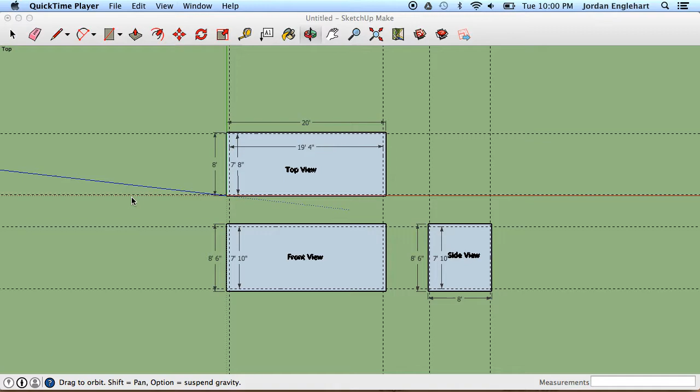Alright, welcome back. This is part 2 of making your shipping container template, the second formative. You should have completed an orthographic view of your drawing and submitted that to Moodle.

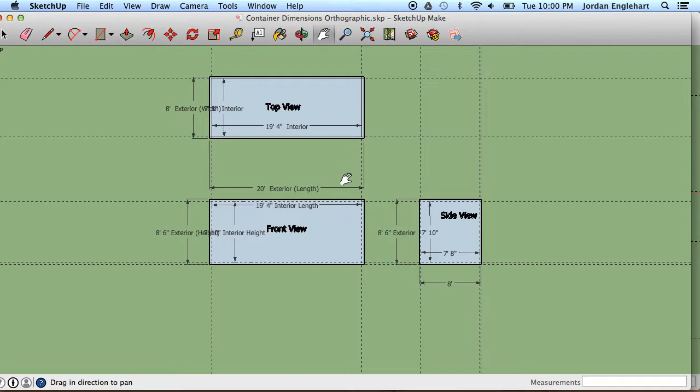This gives us the overall dimensions and familiarizes you with how thick each wall is. I'm going to have two of these open, one that I'll refer back to as I'm instructing since it has all my dimensions on it and I know how thick everything is. If you want a second copy you can, or you can start from scratch.

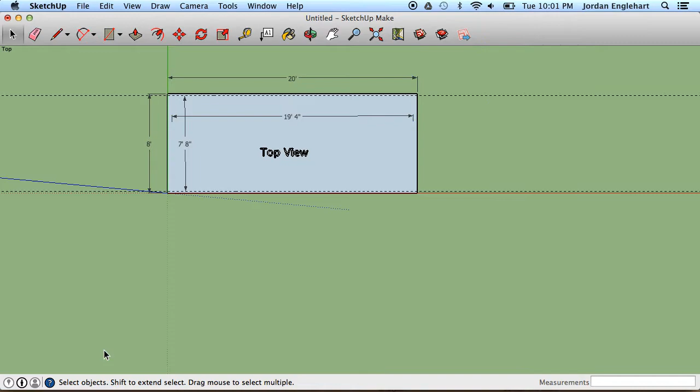So I want to keep this top view. This is where I'll start from. I'm just going to delete everything else underneath it here. Dragging from right to left highlights all that stuff and I can get rid of it. I also can get rid of some of this other nonsense I don't need now, since I have it in this other drawing.

But if you want to just start from scratch you can. You can draw a new rectangle at 8 feet by 20 feet, or 20 feet by 8 feet. So what I'm going to do, basically starting from the top view, is build my base and work my way up, adding each different group at a time.

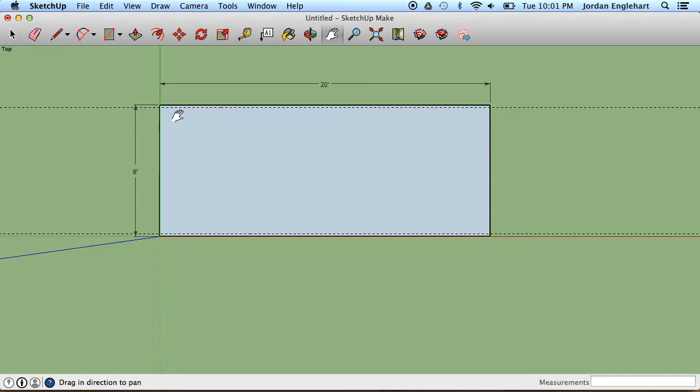So this is going to be my base. Actually, before I get ahead of myself, I'm going to delete these things as well. We'll redraw those in a second, so I apologize for having you delete what we're going to redraw.

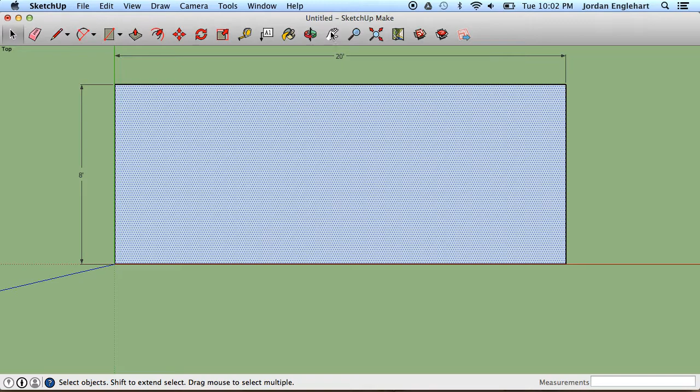What I'm going to do first is take this 20 foot by 8 foot rectangle. That's the outer footprint of this container - it's 20 feet long by 8 feet wide. And we know that this base is 4 inches thick.

We know that because if we come back over here, this would be the front view. You can see in the corner we have 4 inches thick, so we have a 4-inch base. We also have a 4-inch roof, 4-inch front and back, and then these 2-inch side pieces.

So you've already laid that out. That helps us now come over here and picture this. I've made my base piece, and before I draw anything else, I want to make this a group. So I'm going to triple click it and make it a group. Now it's protected.

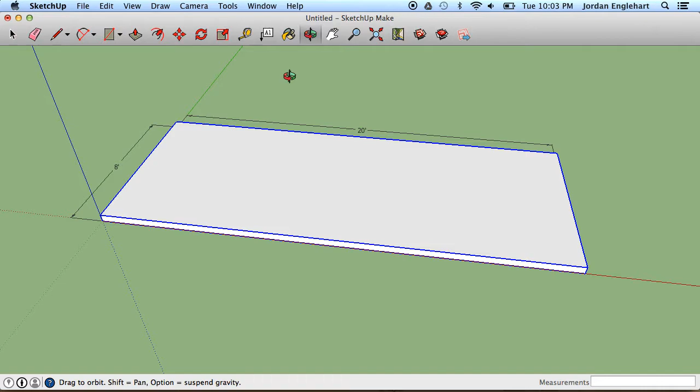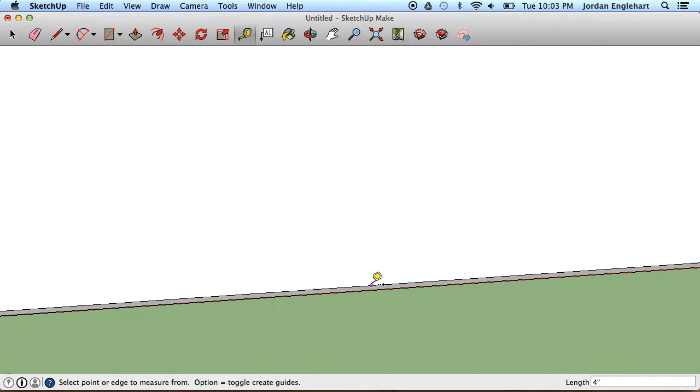Now what I'm going to do is lay out where those walls are going to go. So once again, we know we have 4 inches on the front and on the back, and we came in 2 inches from each side.

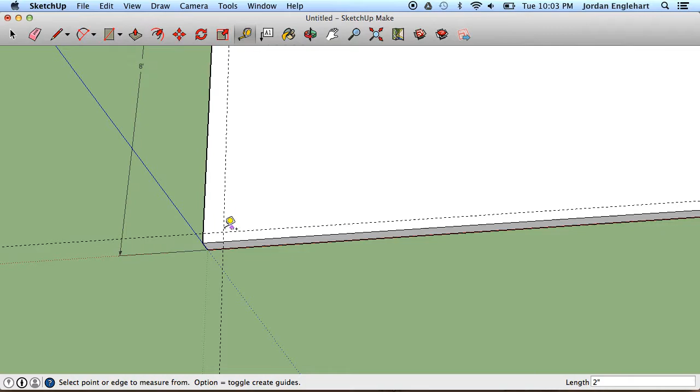So we have where these pieces intersect - that's the same as what we have over here. We have 2-inch front or side pieces, and you should have 4 inches on the front and back. We're just using our blueprints to help us lay this out again.

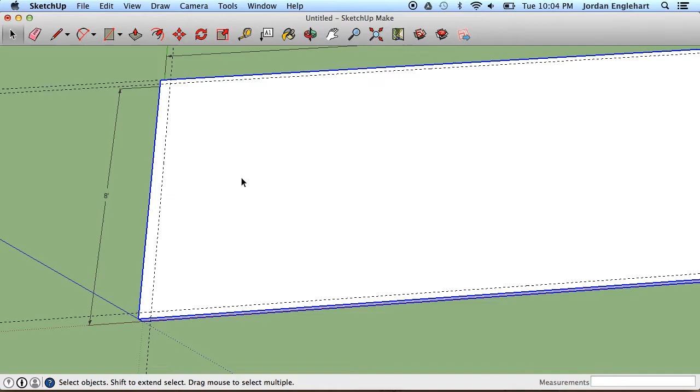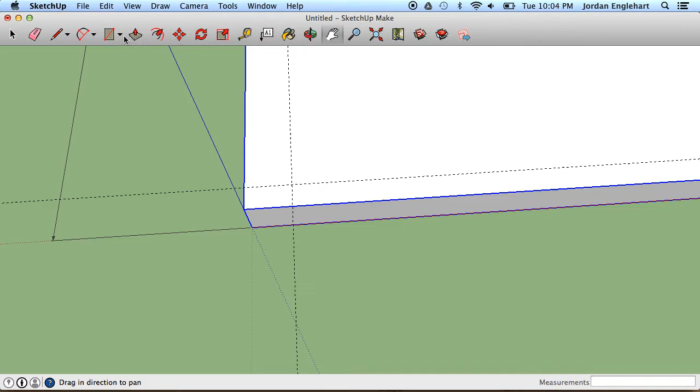But now what we're going to do is actually start building this one piece at a time. So before I do too much, I want to bring this back over here and zoom in on this little square. I'm going to make my corner columns using my rectangle tool, drawing where those things intersect. So now I have this new face that I've drawn here.

And just like I have a bottom base, I'm going to have a top ceiling. So I'm going to make this the same height as our interior dimensions - it's going to run the same distance as our inside. So I'm going to push pull it.

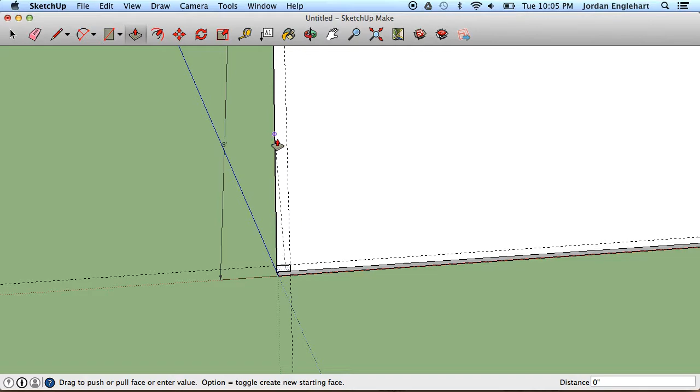If I come back over here to see how high things go, I know our interior dimensions are 7 feet 10 inches on the inside. So if I come back over here, I'm push pulling this 7 feet 10 inches, enter.

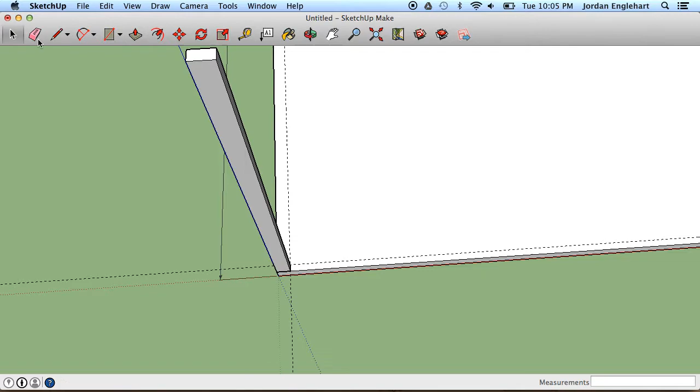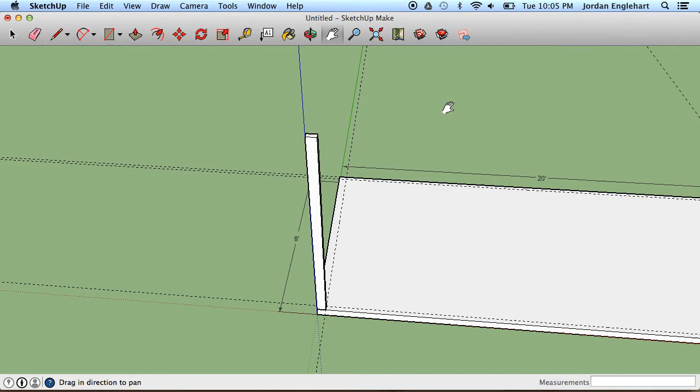What I'm going to do is take this base and put it on top so that I have the 4 inches from the top and the 4 inches from the bottom, plus the interior dimensions of these corner posts. That's going to give us nice even numbers to work with. Before I go any further, I'm going to make this a group.

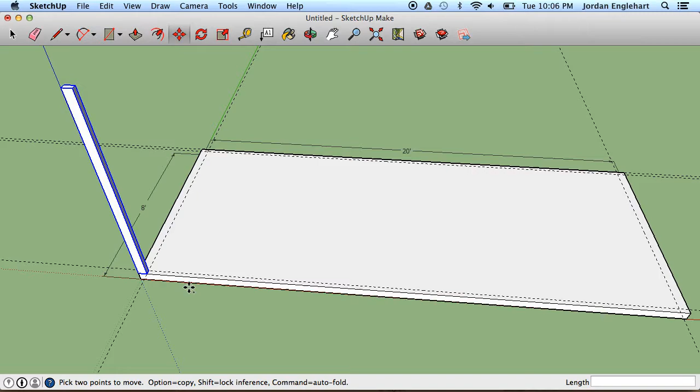That way it's protected. Now all I have to do is move these over to where I want them. I'm going to make a copy, click this corner, and move it along this edge, then pan over.

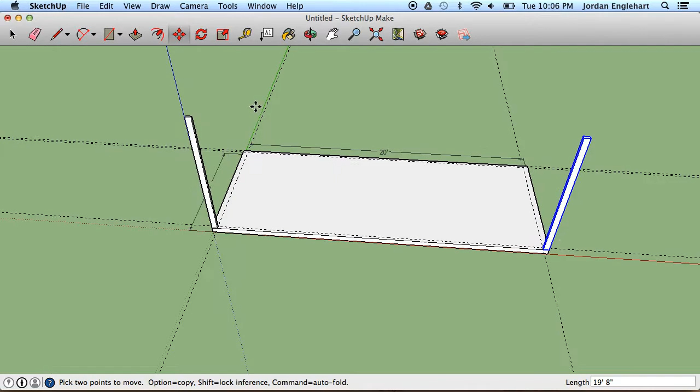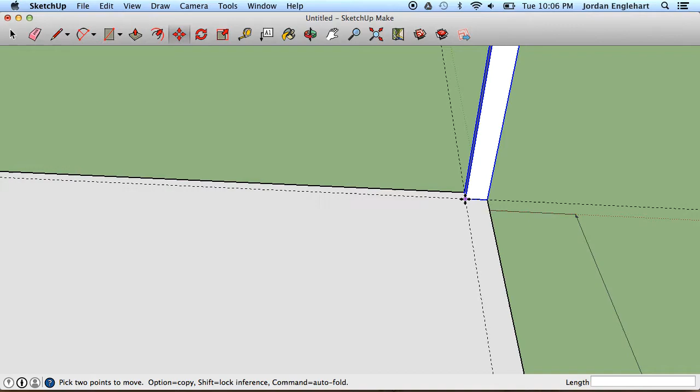Come back to move, all I have to do is click that corner to that corner, and that's done. I can then come over here, and I need both of these to come over to this corner, so I click this one, press shift, click this one, zoom in on this so I can see that corner, press my copy button, click, and bring that into place. So now I have my 4 corner posts like I was describing before.

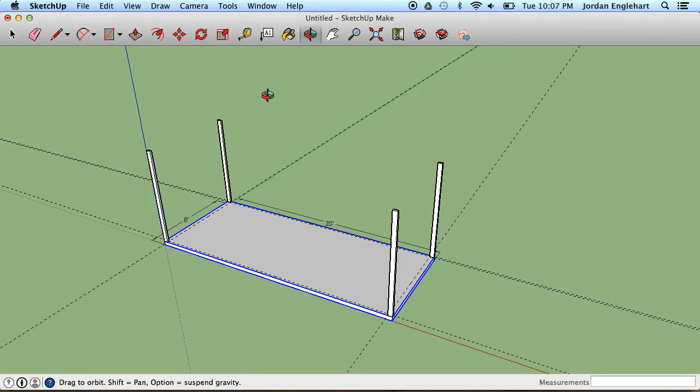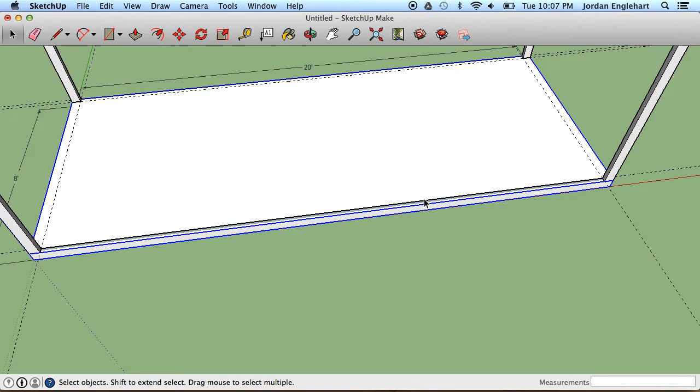From here, I'm just going to keep drawing and filling in as I need to go. Just like we have this dotted line running this distance, I'm going to make another rectangle, starting from that corner and running over to that corner. I've made a new face there, and I can push pull that new face up.

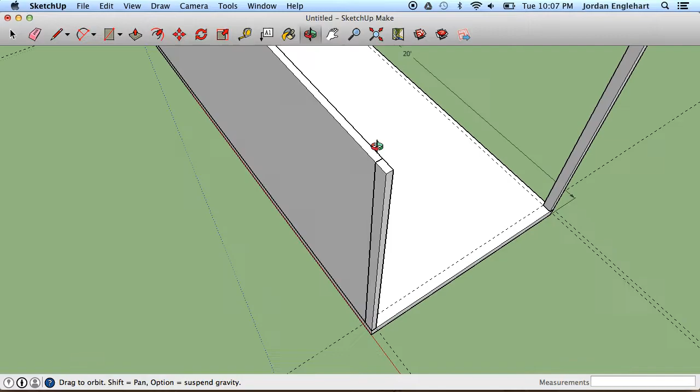I want it to be the same height as that. So that gives me my sidewall. Again, before I go any further, I always want to make sure everything is its own group so that nothing gets stuck together on accident. So I'm going to triple click that new object that I made, and make it a group.

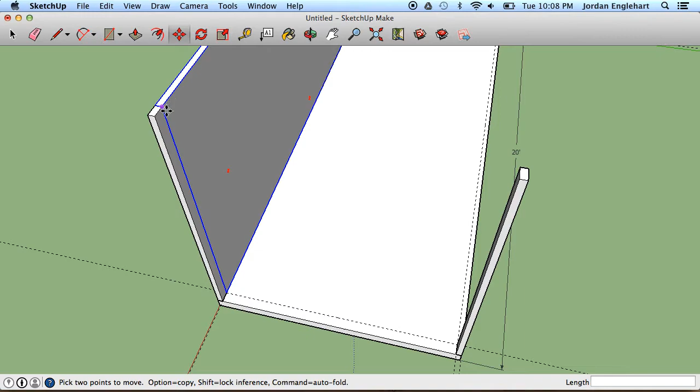And I can copy that and connect it to that corner there. So now I have my side pieces, my front and back pieces.

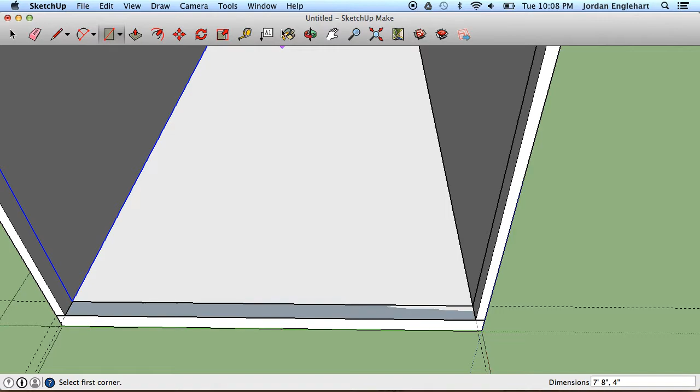Obviously what I'll do next is draw another rectangle. This will be my back wall. Go to push pull, start moving it up. I'm going to pan down so I can see this a little better. Push pull, so it gives me that wall.

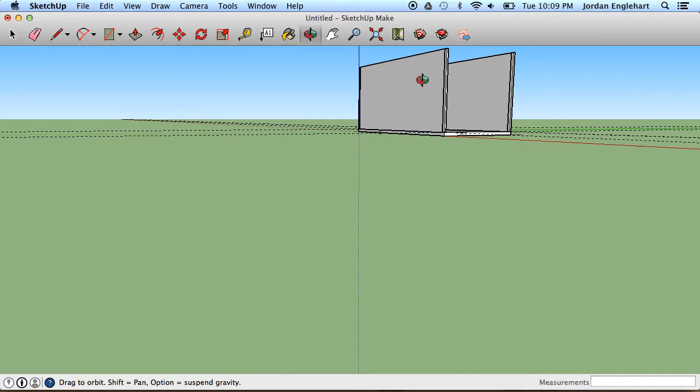Zoom out. As I keep stressing before we go and do anything else, we do need to make sure this back wall is also a group. So I triple click it, right click, make a group. So now that is also a group.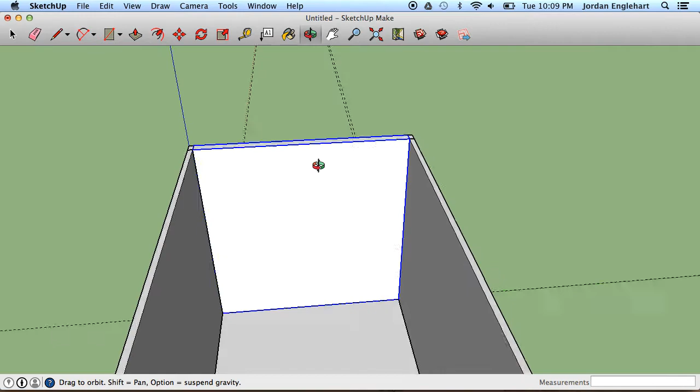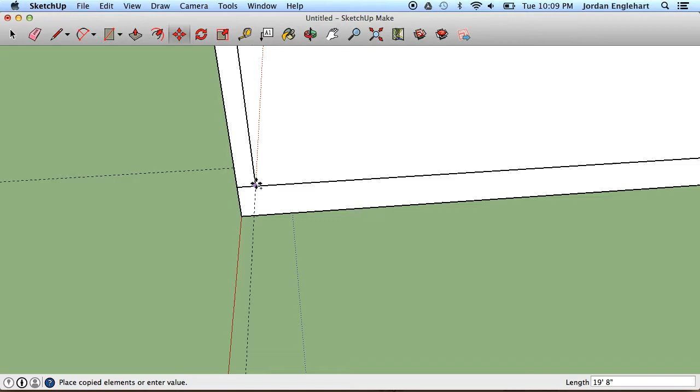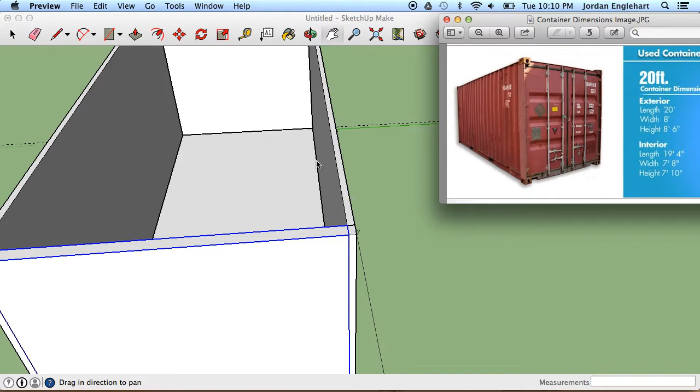This is where we're going to make a little bit of a change. I could just copy this whole thing over just like we've done, grab it by the corner, make a copy, bring it to this corner. So I could do that. However, I've just basically made a box, and as we know from the shipping container, it is just a box, but it's a door, and there's a hinge on both sides here with a break in the middle. So for one of the sides, I do need to make sure I draw that door into place, otherwise it's not very realistic. So I have two options here.

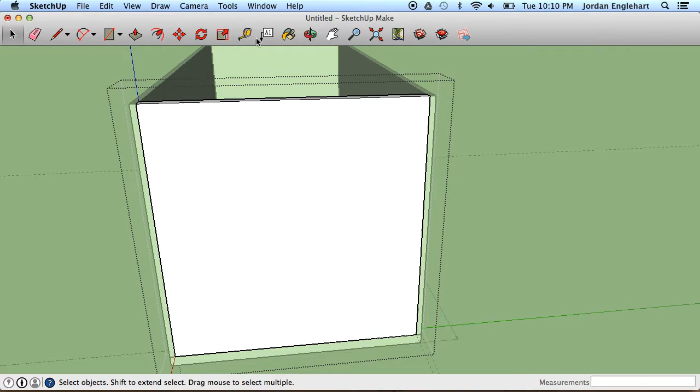I could just go in and make an adjustment here, so I could go into this shape. See how I clicked into it before, it's a group, so it's protected. I need to go into the group, and basically I just need to find the midpoint. Okay, so I found the midpoint there. I'm going to click on the midpoint and come straight down.

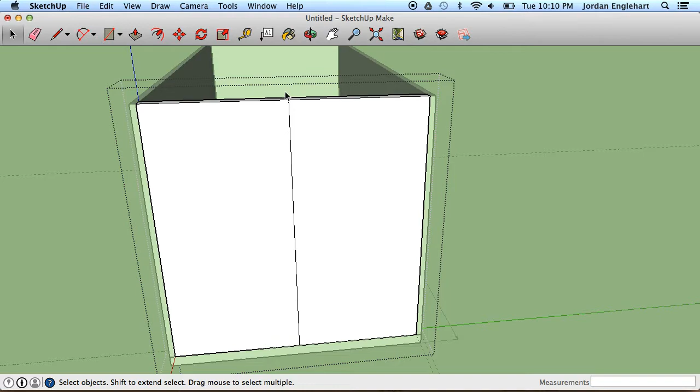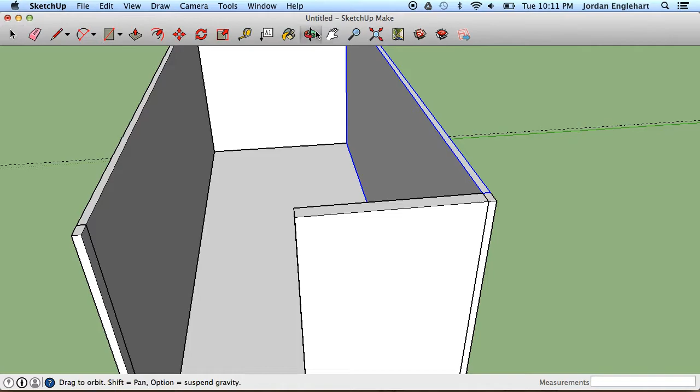You can't really just saw things in half in SketchUp. I can't just make this line go around and make that two different groups. So what I'm going to do is push pull this face to the offset limit of 4 inches, and I'm just going to get rid of it, because now I have this group that's basically the door I'll have in the corner. All I have to do is click on that, copy it, and put it there.

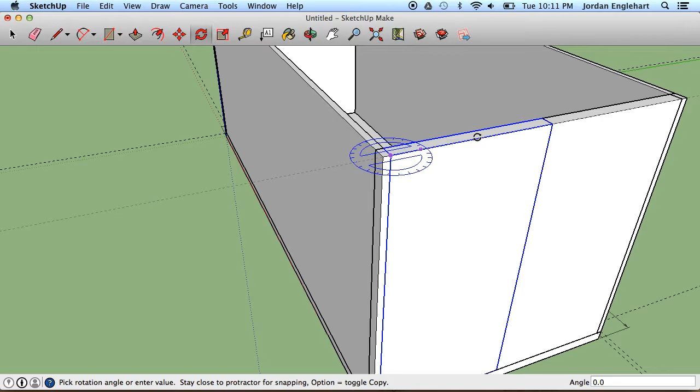So now I have two different groups that provide me the door that I need. This will be good so that when we actually make this look right, I can hinge it and open these doors, making it look more real.

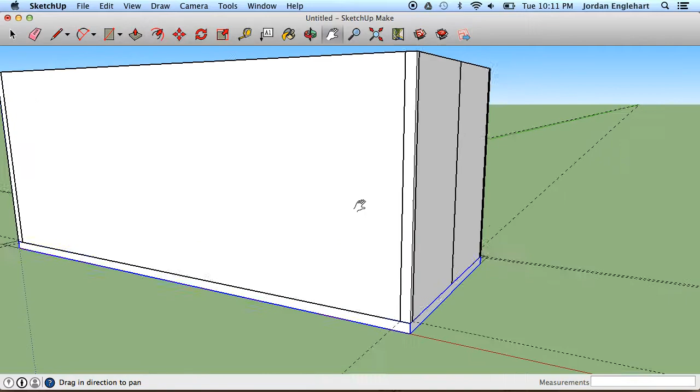So the last step, once again, is making the base and the roof the same, since they're both the same thickness. I'm just going to do exactly what we've been doing: make a copy of this, bring it up, and now we have what looks like a fairly straightforward shipping container. It's not entirely accurate to real containers, because those have big reinforced corners and room for forklifts to go underneath.

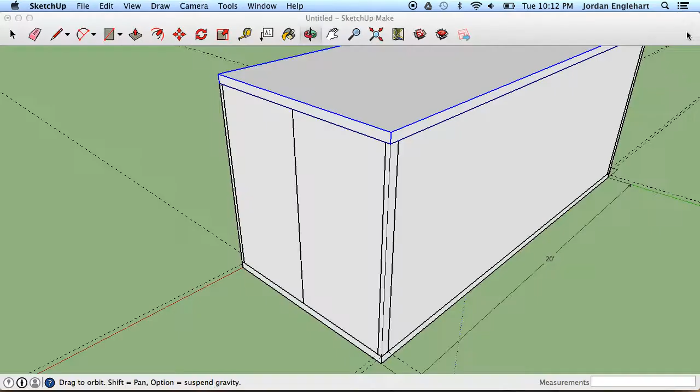That's part of what that 4-inch gap is there. And the side pieces are kind of like this wavy piece of metal. We're going to cheat that a little bit to give us something easy to work with. But we can still make it look nicer and more like what these actual containers look like.

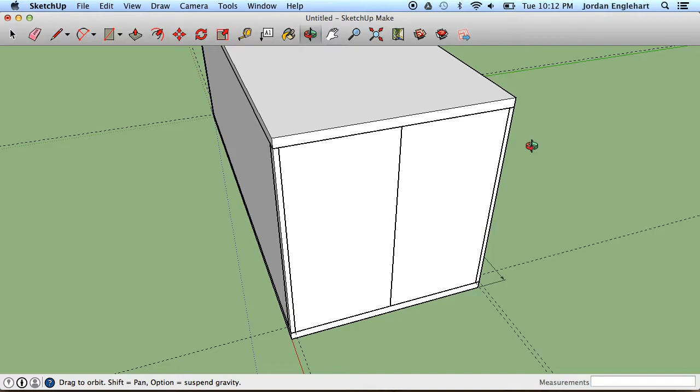Containers are not flat, smooth boxes. They have outer bars that are reinforced, and that's what supports all the weight. So I'm going to change the way this looks a little bit to make it more realistic.

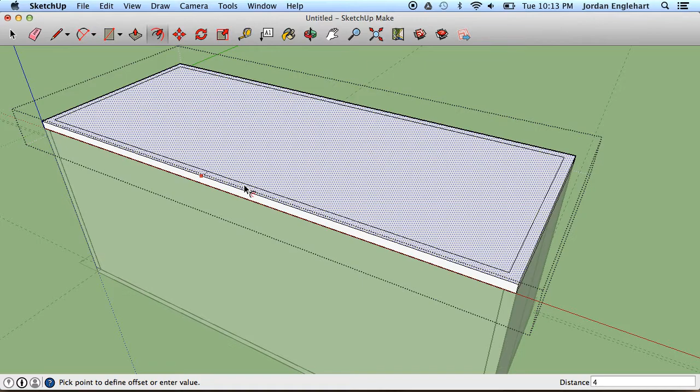I'm going to use my offset tool and offset it the standard amount. We know the front doors have that 4-inch thickness, the front walls have that 4-inch thickness, so for the top I'm going to offset it 4 inches, which gives us this face here. I'm going to push pull that in a little bit, giving us a 4-inch ceiling.

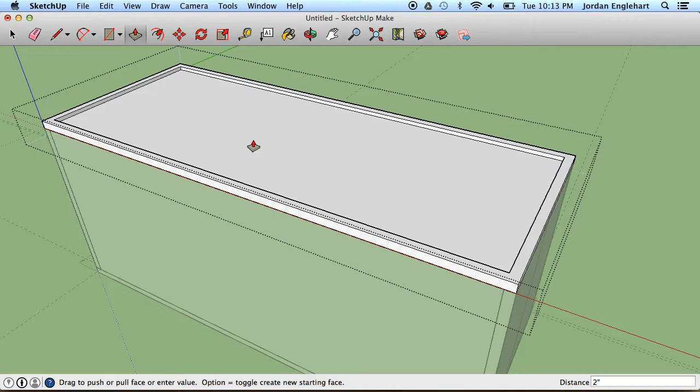It's really thick—real shipping containers don't have 4 inches of metal on top, so I'm just going to cut that in half to 2 inches. Now I've created that edge going around it, and already that looks more realistic to what a container box would have, with reinforced edges and thin metal going around it.

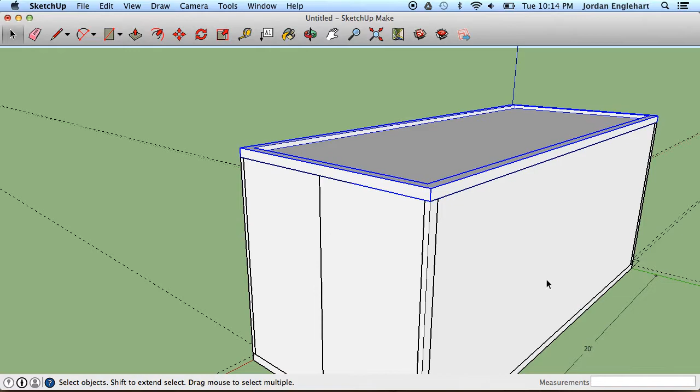I want to do this to all of these pieces—I want my corners to look reinforced, while my sidewalls look a little more thin. So I'm going to go around and do that. However, I don't have to do the offset again on the sides, because the way we've built this, we've already created these corner columns, so I don't need to build that column again, it's already there.

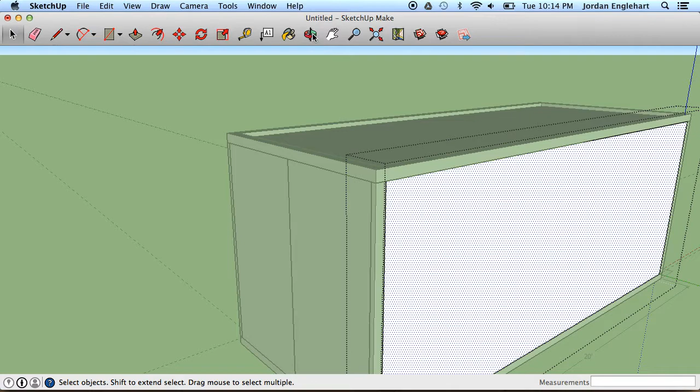So all I'm going to do is go into this group, which is 2 inches thick, and push that in about half the distance. I'll use the push pull tool to push this 1 inch in. Now I have a 1-inch piece of metal, which is pretty much all a real container would be, with these reinforced corners.

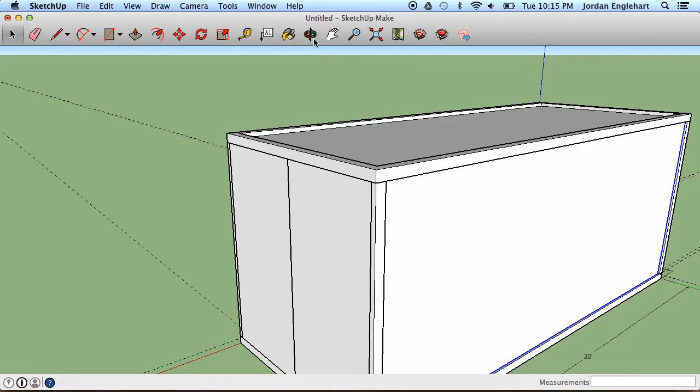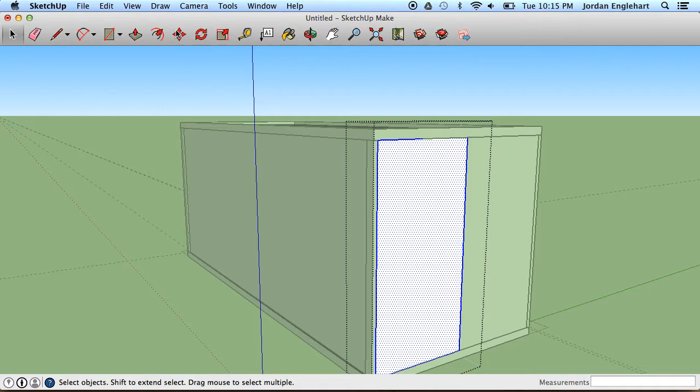I'm going to do the same over here—just push this in, not the full 2 inches, just 1 inch. And I'll do the same thing with the doors. I'm going to push the front door in; these front doors are 4 inches thick, so again I'll take that in half to 2 inches. Do it with this one as well, 2 inches.

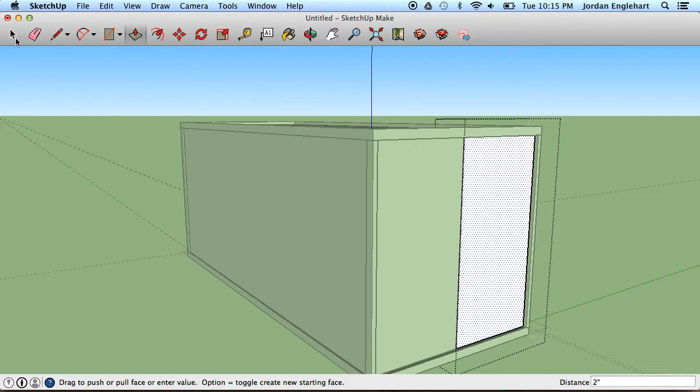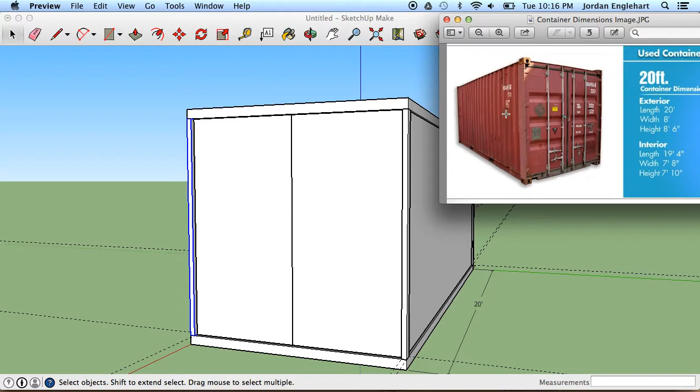You can see how by creating that offset based on the corners, with the metal reinforced corner pieces and the other pieces offset, you start seeing how that's more like what these containers actually look like. If you really wanted to get detail oriented, you could even draw in the bars, which act like your locking mechanisms, going into that little offset you just created. I'm not going to do that with you, but if you want to get super detailed with your doors, that's one way to do it.

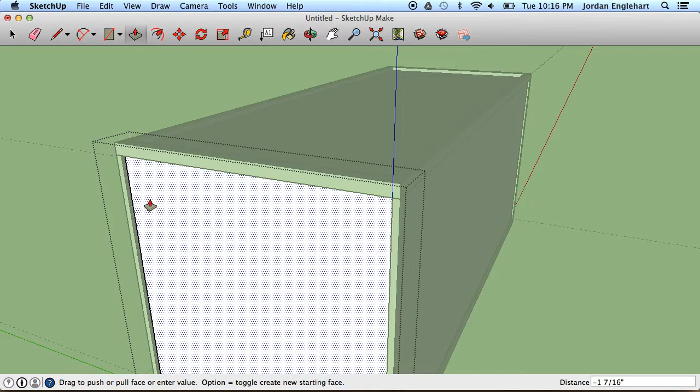I still need to offset this back wall here. The thing is 4 inches thick, so I'm going to just take it half the distance to 2 inches.

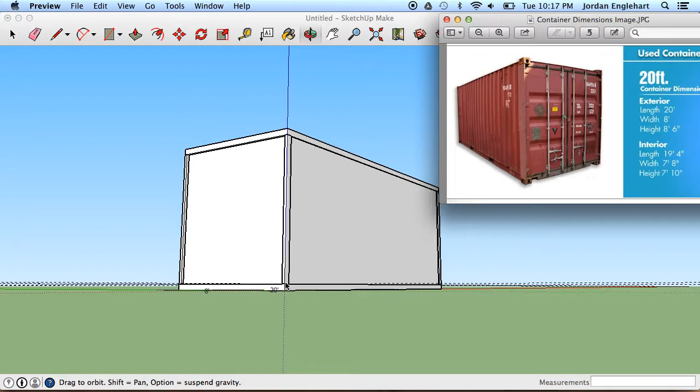Now I feel pretty pleased with how this container looks. We have 2 doors, the top and bottom. I'm not going to bother offsetting the base or floor of it. We could, but the base is kind of thick, purposefully so—that's where you have space for forklifts to slide under to pick these things up, or to put ratchet or tow straps around it to pick it up with a crane. Because these containers naturally have this thick base, I'm going to leave that as is, and it gives you some room to work and play around with how you actually build this and set it up.

So the last thing I'm going to do is, just to make this look more real, go ahead and color it.

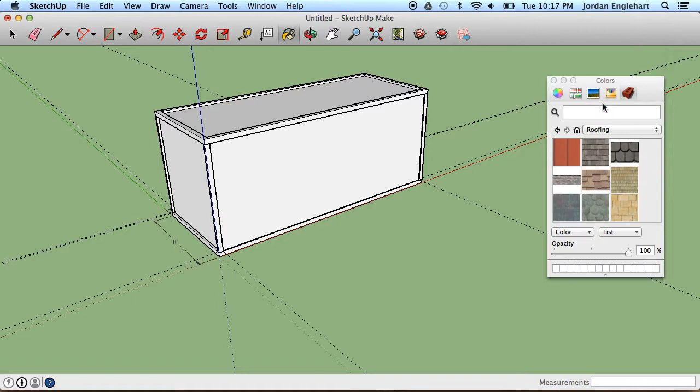So go to my paint bucket, and let's see... oh, the roofing—the roofing is the one that I like. Pick this red roofing color, and we can color all this in.

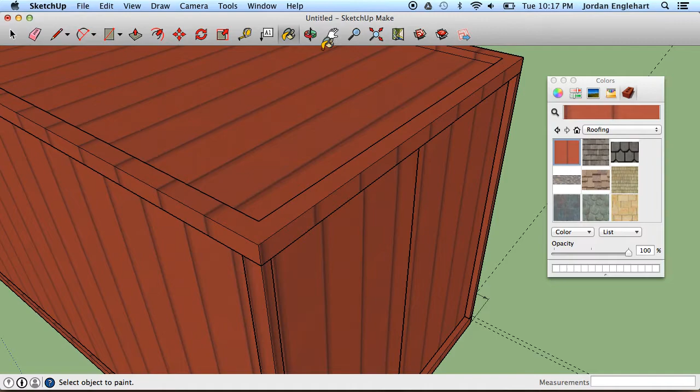This is the template that I would like you to use to start building your shipping container. When you're done, you can paint it any color you like, but I would like you all to use the same template for now. I'd like you to basically show me that you followed along these instructions all the way to the end and painted it the way that I like.

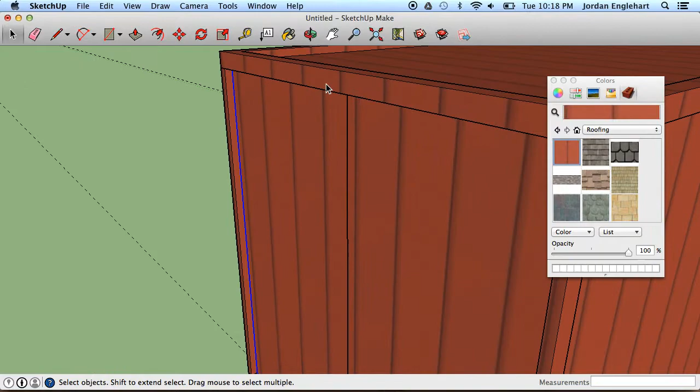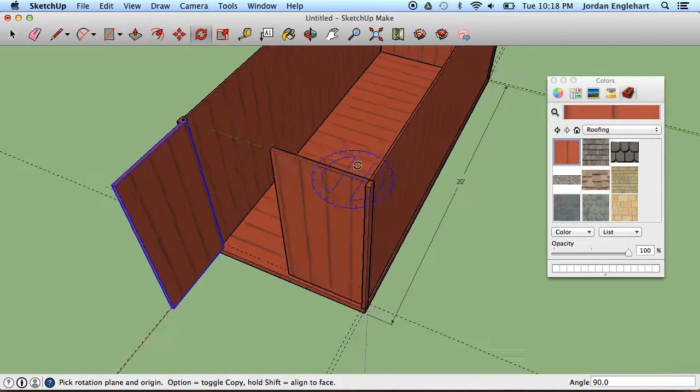I think this looks fairly realistic for what we would want. When I want to open these doors, I can go ahead and hide the roof, then hinge these doors out. Oops, not move, I need to use rotate. So I can hinge that door out. Then unhide.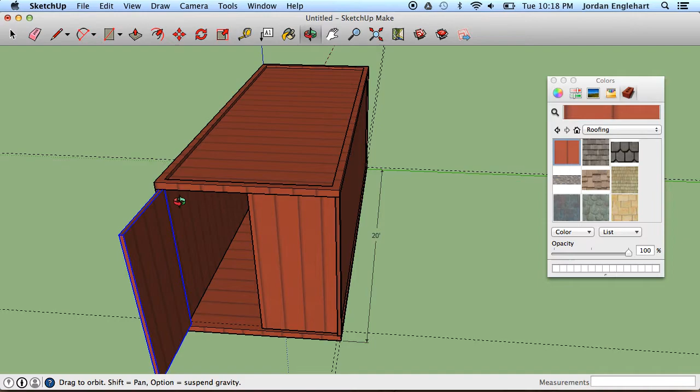You can see already how just by making everything separate groups, it gives us a lot of freedom in how we can actually build this. I can open each door separately. When you actually get in to start building it, you can hide the walls that you don't want to see.

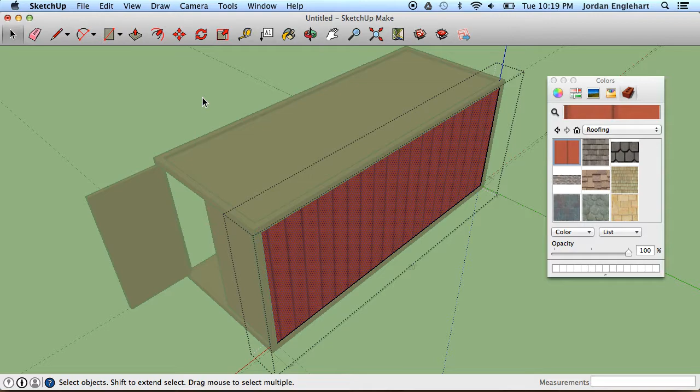Because these are all groups, cutting windows will be really easy—you'll just have to go into the groups and draw your rectangle on the face, push pull it like we normally do. You can cut windows, doors, make things hinge, you can do whatever you want with this for the rest of your project. That is up to you.

But I do want you to go ahead and load this onto Moodle as your container body template. Once I see that you have your template loaded and I can tell that you worked on it and built this, we can then go ahead, and you can get started on actually designing how you will turn this into your living space.

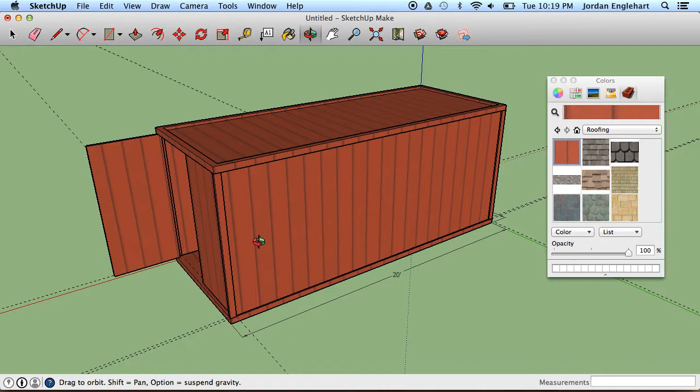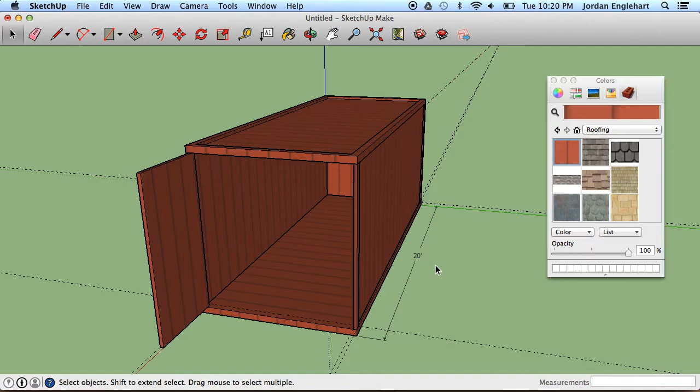I do just want to point out once again, I left these dimensions here purposefully. Our overall exterior dimensions are still 8 feet by 20 feet, and because of the care with which we drew this, if I was to go in and measure, my interior dimensions would match the interior dimensions on our sheet here, because we built these walls up to fit the way it's supposed to fit.

So, congratulations, you have a template for a shipping container body, and from here you can start building your final draft container where you make this a living space.